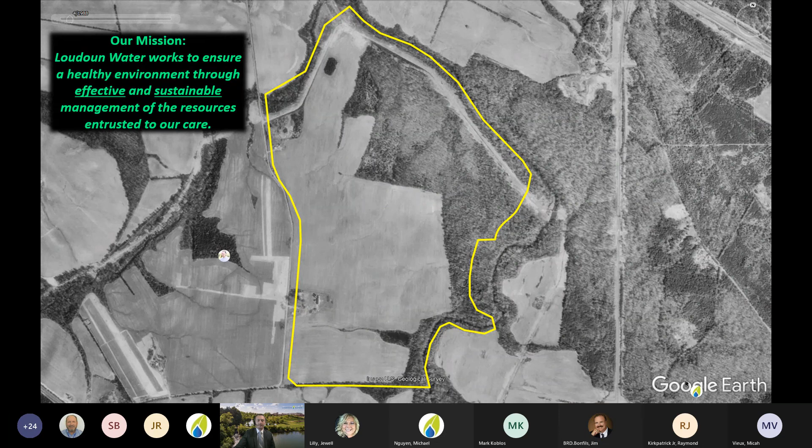So in terms of our wastewater program, I like to think of it as a story. And when we look back on that story, I first arrive at this image of our Broad Run property here in the late 80s. And when we purchased that property, we had a clear vision for the future. Our mission statement resonates, that we work to ensure a healthy environment through effective and sustainable management of the resources entrusted to our care. When we self-reflect on this, I think we all agree that it has truly been our effective and sustainable practices that have afforded us the success that we've enjoyed in terms of the facility we have today.

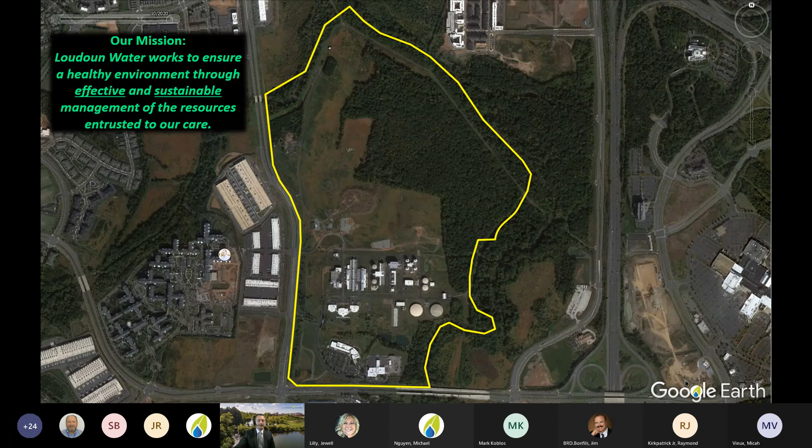And so when we play that forward, we truly have a clear vision for the future with our wastewater program. I want to pause here for a moment. This image before you depicts the master planning efforts for the Broad Run property and in the context of the floodplain that encroaches on our property. You can see here that truly our master planning efforts utilize virtually all the buildable land over time on our property. And this is important.

These planning efforts have allowed us, when we are approached by outside parties with development proposals on our property, to fully understand managing wastewater flows for the county in perpetuity. We will be utilizing this land and we're positioned to know what those plans are. So as we move along in our wastewater story and execute on this master plan, there are a few key themes that I wanted to highlight before we dive into the presentation today. And those include rapid dynamic growth.

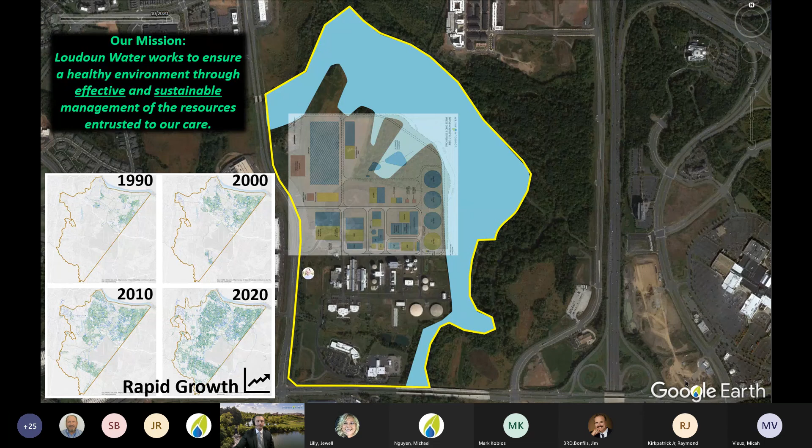And just over the past 30 years, we've seen nearly a 500% increase in the population of our service area. The second main point is the interconnectedness. Our plant is located just upstream of the major drinking water intakes for the Washington metropolitan region.

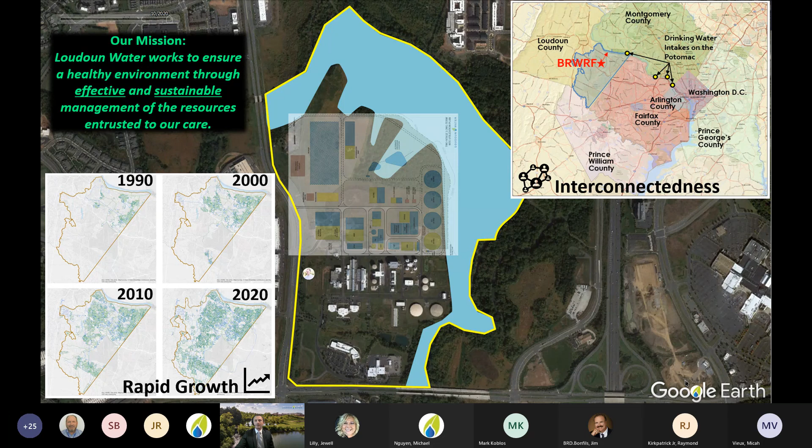And truly, that's a portion of our drinking water through Fairfax. And lastly, that is advanced treatment. So it's our imperative to employ advanced technologies to protect the resources that I described a moment ago. And so this all boils down to a key practice for us, and that's been effective and sustainable planning. Notice those key words from our mission statement keep popping up. And when we look back across our history, this practice truly comes to life.

From our inception, we've proactively managed wastewater capacity with DC Water through the Potomac Interceptor. And then moving through time with respect to Broad Run, the planning started for the facility well over 3 decades ago. Various studies in the 80s leading up to the purchase of the property, and then early entitlements work to allow for construction of the facility on the site.

Getting into the late 90s and into the early 2000s, early piloting of the technologies that we would later employ there, design and construction of the facility in the early 2000s, and then leading into startup and commissioning in 2008, and then the recent master planning efforts and current expansion efforts underway. So it's been our continuous adaptive planning over time that's kept us nimble in this success story and within those themes of rapid growth, interconnectedness, and advanced technology.

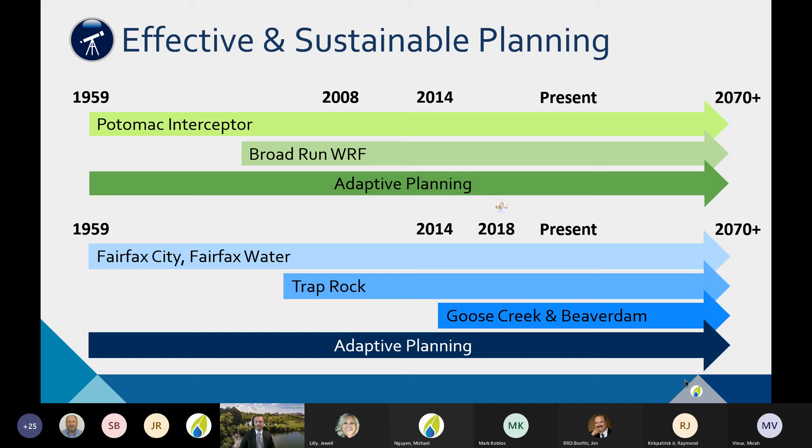And so I just want you to keep that in mind as we round out this introduction with a few key takeaways. And that is, the wastewater flows are continuing to increase steadily, and they will continue on that trajectory with Metro and the development intensification, data center growth, and so forth. And we're continuing to track that and react.

And secondly, again, the interconnectedness of our system, both physically and by permits. There's really, again, an imperative on us to protect the environment. And our permit, as we grow, our discharge limits approach those of drinking water quality. So that leads us into the advanced treatment technologies.

And lastly, again, the long history of visionary and adaptive long-term planning. So that really rounds out the key takeaways that I hope you will keep in mind today as we go through this presentation. And I'm going to go ahead and hand it off now to Kendra Sveum, and she currently serves as the plant manager of our Broad Run Water Reclamation Facility.

Kendra, I think you're muted.

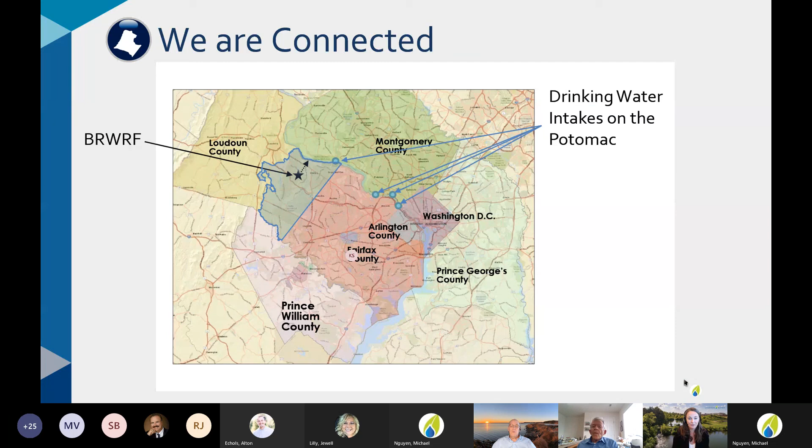Absolutely, PFAS is definitely a hot topic for wastewater treatment plants. To the benefit of how Broad Run is already set up, I think it's a testament to how advanced we already are. The key technology the industry is looking to for removing PFAS is granular activated carbon, GAC. The fact that we've already got that GAC process means we're doing a level of PFAS removal prior to our discharge.

PFAS gets incredibly complicated on the wastewater side because when it's present, it can change forms as it moves through the treatment plant. We can take really long PFAS chains that are hard to measure, so they don't show up in our influent, and break them down into shorter chains that are easier to measure. So there can be times our effluent looks higher than our influent, but it's because we've transformed that PFAS - not that it isn't naturally occurring, but the process of breaking it down in the bioreactor is natural, into something more easily measurable.

So we're definitely studying this at Broad Run right now, evaluating the performance of our GAC and what's going on there, but we are very well positioned for effluent removal. The area where we really need to look going forward is that it accumulates in the biosolids. So our major outlook is: what do we do with what's in the biosolids, so that we can still land apply those solids? That'll definitely be a topic over the next couple of years - what treatment processes can best address that. Thanks.

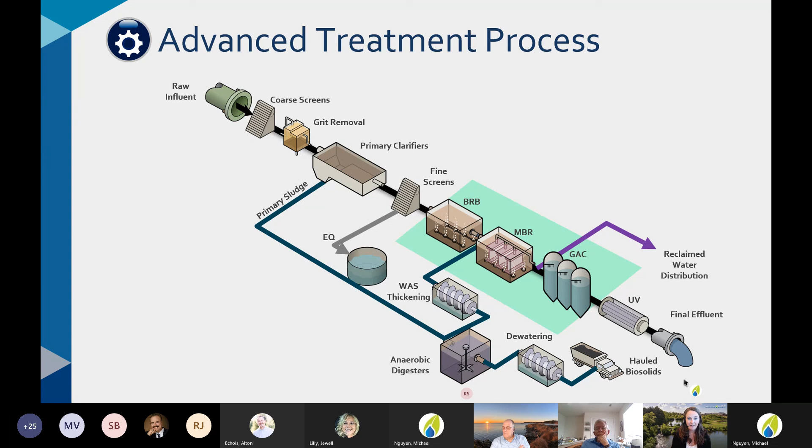And additionally, phosphorus is astounding, right? We are at a total phosphorus limit of 0.1, where this utility is at a total phosphorus of 2. So we are orders of magnitude higher in our nutrient removal levels, and it goes through all of the numbers.

E. coli measures our level of disinfection, so it's even lower. Broad Run has been held to a higher standard historically because of our location, and because of that we put the right technologies in from the beginning - the GAC is a great example, positioning us well for contaminants that are just now coming out. That's why we're going to have to continue this exceptional level of work and make sure we're taking into consideration the processes everyone around us is using as well.

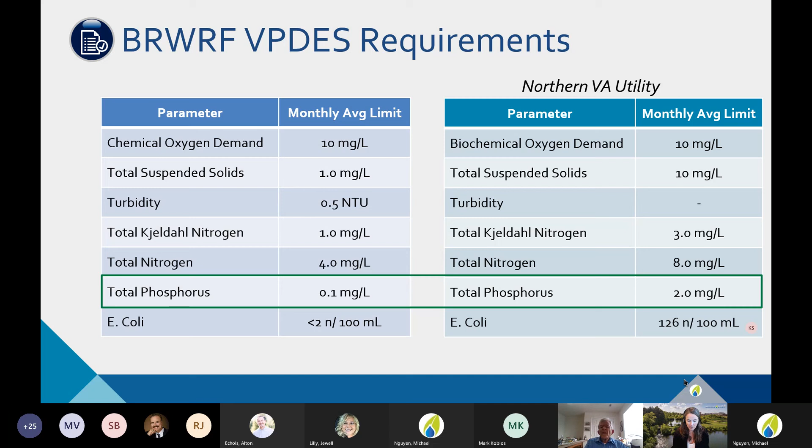So we want to transition now, unless there are any other questions about technology, into our projections of what we're looking for in the future.

All right, I'm going to turn this initial discussion over to Darrin Geldert, who is our Manager of Planning Programs, to talk about growth in the county. Thanks, Kendra.

So in order to maintain that kind of effective and sustainable planning that Alton was talking about, and this adaptive planning that we do, it's really critical that we have a long-term vision as we develop our planning projections related to our permits, loads, and flows. That's the most direct way you can see it. As Alton showed us, this whole area is a really dynamically growing region, and this growth is pushing us forward a lot faster than the rest of the state.

So we're out in front, similar to our permits that Kendra was mentioning. Loudoun County continues to be one of the fastest growing counties in the state, and actually even in the country. So as we look forward, it's a bit of art, a bit of science, and we know these projections of growth have both lagged and exceeded the actual realized growth over time. So what do we do? Well, we lean on the county, because they are responsible for growth projections, and this is a key that we have to follow.

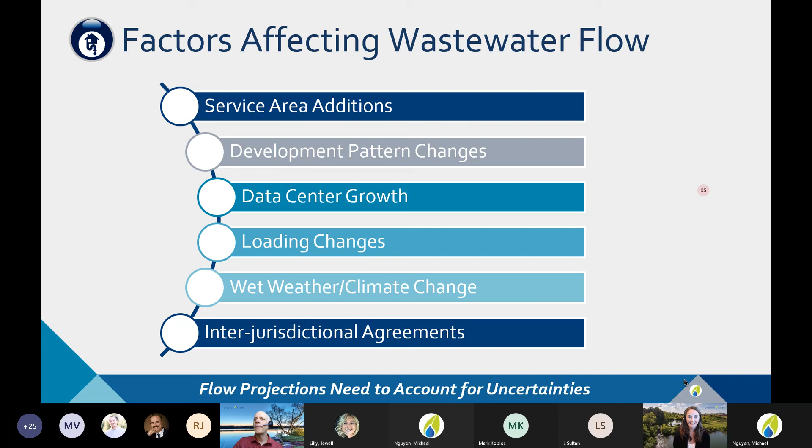Thanks, Darrin. So definitely at Broad Run, we spend a lot of time looking at where our flows are going and what our treatment capacities are, to make sure we've got a handle on where we are today and where we need to be in the future. So Loudoun Water is amazing, and the amount of flexibility we have allows us to use different tools to meet the needs of our service area.

So I wanted to start with just this map, because our wastewater treatment capacity is broken into 2 increments. We have the agreement with DC Water for wastewater that we can send down the Potomac Interceptor, which travels through our service area in this general area, down to the Blue Plains Advanced Wastewater Treatment Plant. So this blue area right here is the portion of our service area that continually goes down to DC Water. The brown area is the area of flow that travels directly to Broad Run.

Broad Run is located right in the middle of our kind of PI portion of our service area from the Potomac Interceptor. We've got this green portion down at the bottom, and this is our section that flows by gravity through Fairfax County down to UOSA. So we have a 1 MGD agreement with UOSA, and then the capacity that we have by agreement with DC Water is 13.8 MGD.

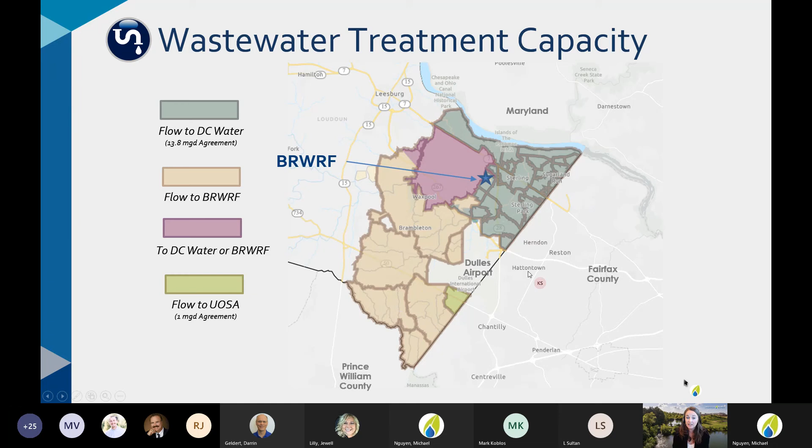So due to its size, it is more cost effective to treat flow down there. So we want to maximize everything that we have from that agreement. When we look at our wastewater flows, we need to look at the total wastewater generated from this service area and then balance that out between Broad Run's capacity and our agreements with our neighboring utilities to get additional treatment capacity.

So that's what we want to look at here. This graph is a little different than graphs shown in the past. It's showing our total wastewater flow, and we've got 2 lines showing our combined treatment capacity. UOSA and that small green area flow has been excluded from this discussion because there's no control down there over being able to send more flow. It's a passive system. So if we take our current Broad Run capacity of 11 MGD, and I don't think I stated that previously, but we have 11 MGD right now, and DC Water 13.8, that puts us at about 25 MGD of total treatment.

So what we've been monitoring as we monitor growth is how fast this flow is increasing. What we've got plotted here, this line is just a straight line average of the last 10 years and how fast flow has been increasing. It's about 0.6 MGD per year. We can carry that projection forward and say, based on development patterns continuing as they are, a simple statistical projection shows that by the year 2030, we're going to need maybe a total of 28 MGD treatment capacity if we continue at that rate.

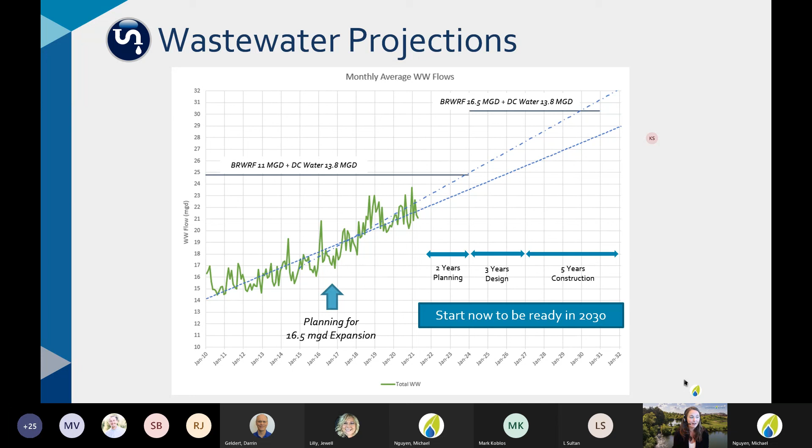And so that is part of the process we're going to be talking about, how we've prepared for where we are and where we want to move moving forward. I want to switch topics, unless there are other questions on the flow projections, into what we're looking at and our major work to be done in establishing what we're going to build next.

One of the major challenges that we have is our waste load allocation, and I wanted to take some time to talk about what that allocation is. Probably 1.5 years ago, we came to a board meeting and talked about the Chesapeake Bay Watershed Program and the Phase 3 WIP and the modifications DEQ were talking about at the time. So this all factors into a lot of that.

Just as a refresher, the Chesapeake Bay program is about protecting the entire watershed, so it involves multiple states that all contribute water down into the bay. Each state has been given its own waste load allocation, and the states then divide that up as necessary. So what you end up with is Maryland, Virginia, Pennsylvania each implementing slightly different programs, but all to meet the state's total waste load allocation.

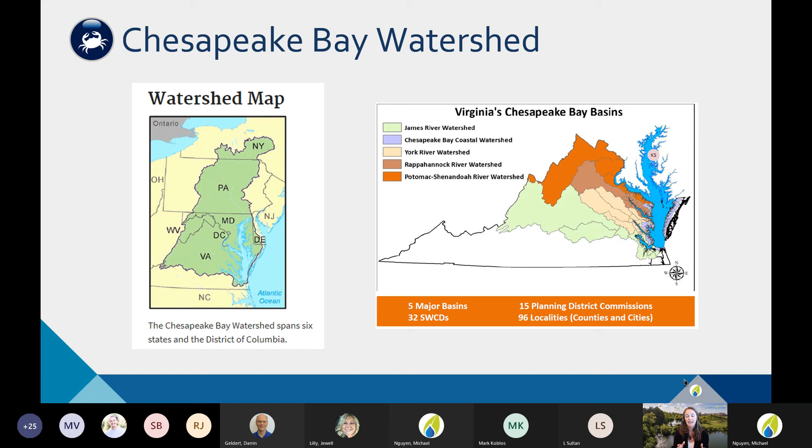Virginia has broken that down further into the various independent watersheds from the state that contribute to the bay. Broad Run is in the orange, so we're in the Potomac River watershed, and the Potomac Basin has its own waste load allocation that is then divided up to all the wastewater treatment plants. So this is one general permit.

It's not technically covered in our VPDES permit that we looked at originally for our discharge. It's a permit that covers all wastewater treatment plants for the state, and there's one big table in that permit that lists each plant and how many pounds of TN and pounds of TP that a plant gets to discharge.

As we've been talking through this, we have flow projections, but load projections are the other concern that we look at, because as development changes and we get more low water use fixtures, the wastewater coming in becomes more concentrated.

When we look at flow projections, that's typically done assuming those base constituents like COD, nitrogen, and phosphorus are all at an average concentration. But if that concentration changes, we get more pounds in. And that's what the treatment really has to be based on, is can we remove each pound of phosphorus and nitrogen that we have entering the plant?

That's the way our discharge is permitted for the bay, because the bay itself really just cares about the total pounds of nitrogen and phosphorus available for the biology in that location, causing algal blooms and decreasing water quality there.

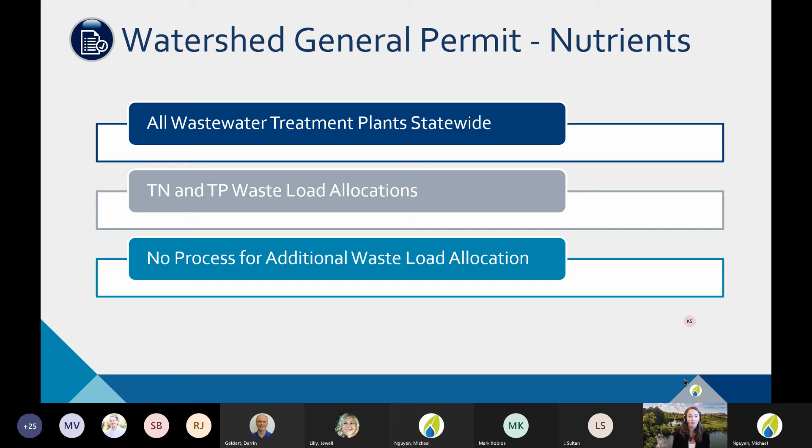Broad Run is now really one of the first wastewater treatment plants running into that limitation. We're expanding faster than any other plant in the state and running up against the limits of our waste load allocation. Because our allocation was given on a number of pounds, and we don't have a process right now to get more pounds, as we discharge more flow that drives the concentration of our effluent lower.

So this table is just illustrating the equivalent concentration that Broad Run's effluent needs to meet so that we remain within the pounds of discharge that we have right now.

We were given our initial allocation based on our 11 MGD design capacity and a TN concentration of 4 and a TP of 0.1.

Regulatory for the state of Virginia, the limit of technology for TN removal and TP removal is considered a TN of 3 and a TP of 0.18.

So even from our inception, our TP effluent concentration was really considered beyond limits of technology and state of the art.

Nitrogen was allocated throughout Virginia on a TN of 4 basis, but the DEQ will be looking at any plant needing to expand as going to that limit of technology, a TN of 3. That's just as regulations stand right now.

What is unique for Broad Run is where our waste load allocation takes us beyond that. So after our expansion, when our actual wastewater flows start reaching 16.5, we would need to be at an equivalent total nitrogen concentration of 2.6, and phosphorus would be down at 0.067.

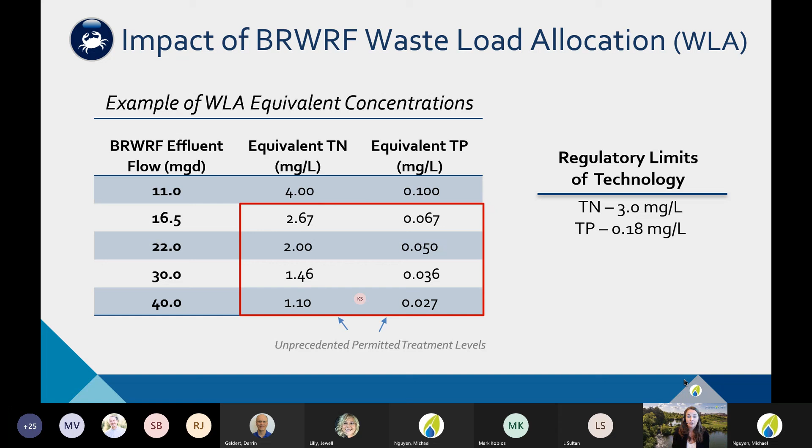So while that looks scary in terms of the numbers, we have a great plan. As part of the master planning that was done in 2016, a large nutrient management study was done that literally looked at the world of options in terms of what can we do to manage nutrients.

Is there a way to remove them in the collection system? Is there a way to look at algae removal, just really advanced technologies that we can do? And it's given us a toolbox. So while we work out with DEQ where we think that effluent requirement is going to go, we've got tools that we will use in the meantime.

The reclaimed water system is an extremely valuable tool for this. That is our method of, while we have flow coming in, not discharging all that flow back to the bay. We're diverting not only the flow to our reclaimed water system, but those pounds of nutrients as well. In general, the flow that we send to those cooling systems, we only get about a third of that back. So it has reduced the water and concentrated the nutrients, so that when it comes back into Broad Run, it's in a range that we can easily remove. That's a tool that's going to help us going forward, and it will definitely pay off to maintain and continue to support that program due to the amount of offset it can give us.

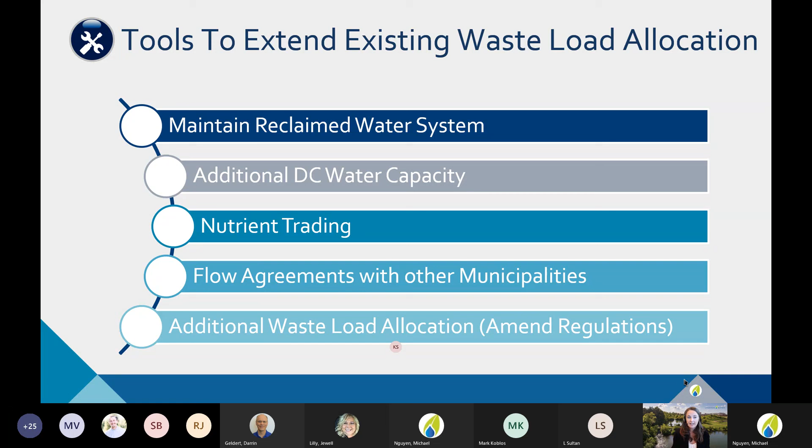But really what is key for us, and what we've been focusing on very heavily over the last year, is forging a way to change the regulations so that there is a pathway to get additional waste load allocation. We feel very strongly about this one because it was acknowledged in the beginning as an issue that was going to need to be solved. Since Broad Run is really leading this charge, Loudoun Water will be one of the leading utilities to really push this through, but our goal is to have something that works right for the whole state.

So we wanted to give you a brief update on where we are in that process. We started in November of 2020 with just approaching DEQ and having a meeting to make sure that they understood the issue that we had. We showed them similar flow projections and laid out those equivalent waste load concentrations, and talked to them about what would be some options for us, also gauging how open they were on this.

It just so happens that in 2020 and 2021, that nutrient general permit was up for renewal. So we took that opportunity to submit a public comment to DEQ and also the State Water Control Board, really laying out this issue and illustrating that there is a deficiency in the regulations as they stand, not having a way to get additional allocation when it's needed, not for backsliding or reduced treatment, but just to accommodate growth. In Carla's board comments at the March board meeting, we laid out that we would submit this comment during the public comment period on that renewal, and kind of see what happens from there.

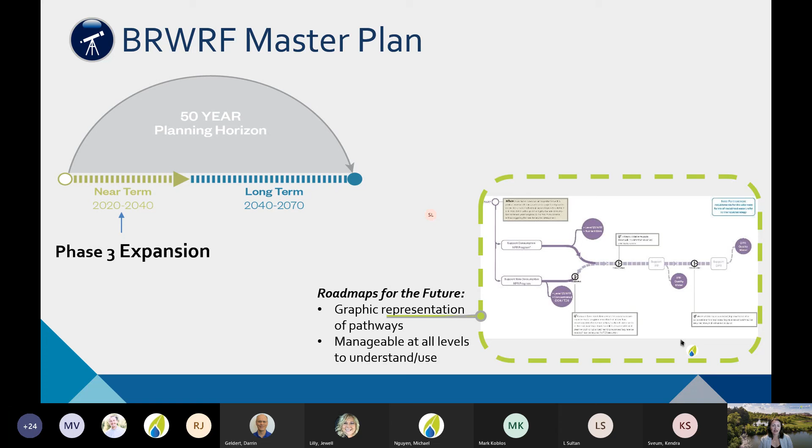This is that adaptive planning that Alton was talking about. One of the valuable things Alton mentioned was looking really far out—what did we gain in the master plan? One of the really valuable things we understood was that the land we have will be used in the future based on what we think is in the world of possibilities. That was valuable for us.

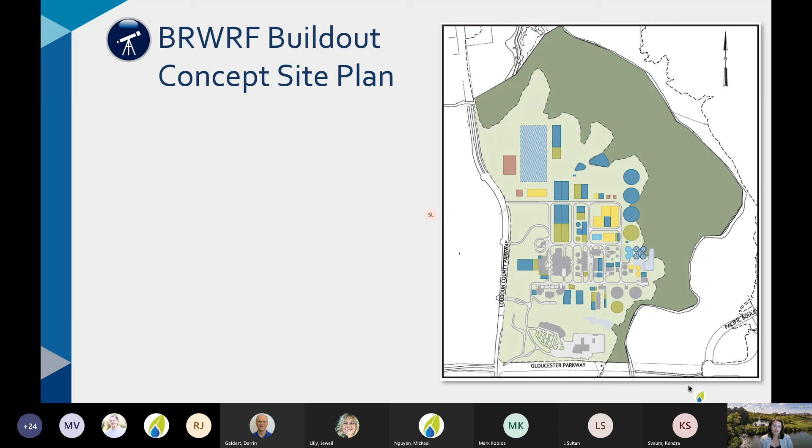We're operating facilities, so naturally we have needs, and we've identified other opportunities—things like the reclaimed water pump station you see here and storage tanks. That wasn't part of the original facility, but it was a great opportunity for us, so that project was constructed. The facility has continued to evolve, and we've learned a lot as we've operated it.

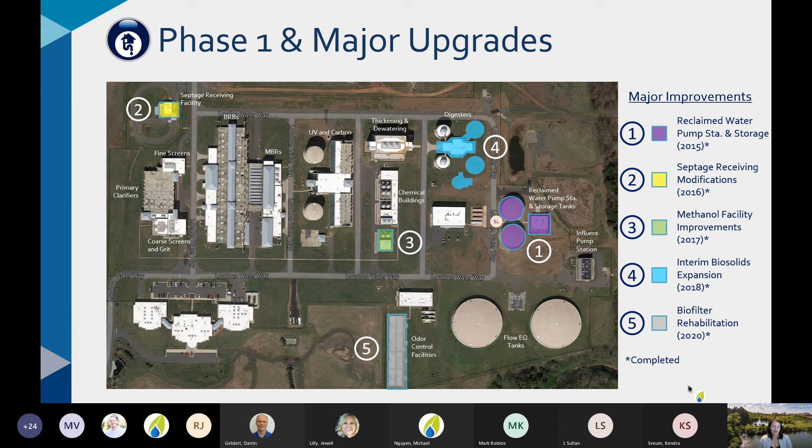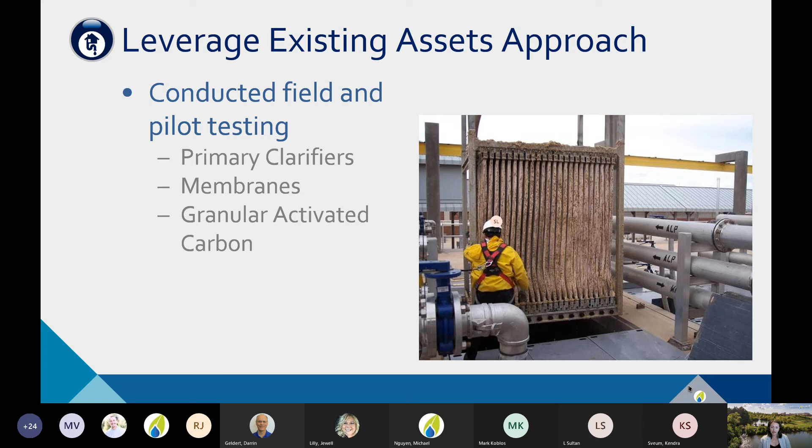What that meant for us was to leverage the assets we had already invested in. So the heart of the plant, this picture here is one of the modules of the MBRs, the membranes. We looked at that technology to understand what we could do to squeeze more capacity out of it so we wouldn't have to invest in more concrete. What can we learn about our granular activated carbon system to squeeze more capacity out of it? We learned that some of the original design criteria used to size the facility, as we'd operated it over the years, had some juice for squeezing. So we took an approach to build our phase 2 expansion project.

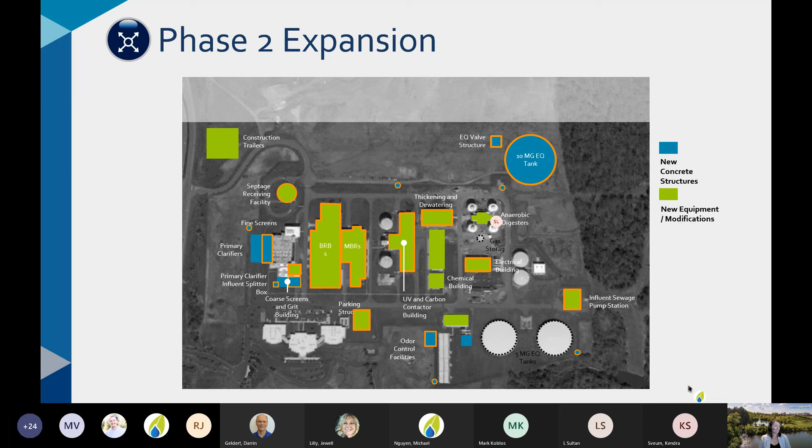As we went along in the phase 2 project, we started to look at other Broad Run projects out there. We have a really robust asset management program that helps inform projects needed over time based on useful life and things like that. It's an operating facility, so that's just part of running it—you have equipment, renewals, and things that need to take place. We folded some of those projects into the phase 2 expansion project, and there was additional value for us, cost efficiencies that could be gained by doing that.

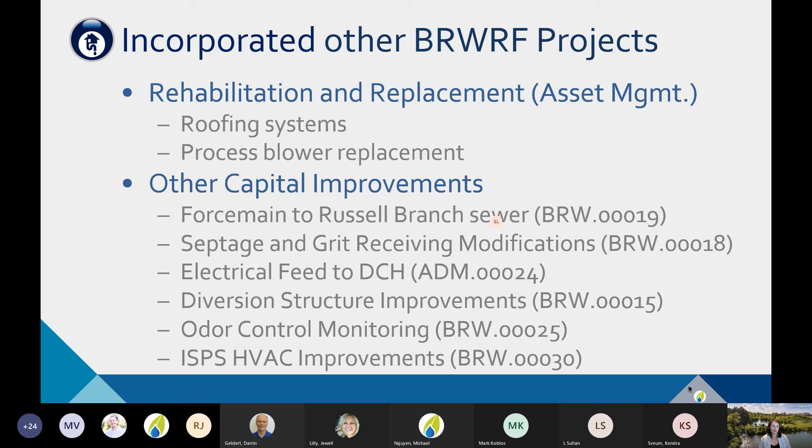Naturally, there were other capital projects identified over previous years, some consistent with or predating the expansion design. As we looked at what the project was and the timing for these other projects, we were flexible and nimble, and realized the benefit we could gain by incorporating some of these other projects into our expansion project. This is the approach we take as we navigate a project—constantly feeding data and understanding what else is going on related to facilities to help us build the best project with the most cost efficiency.

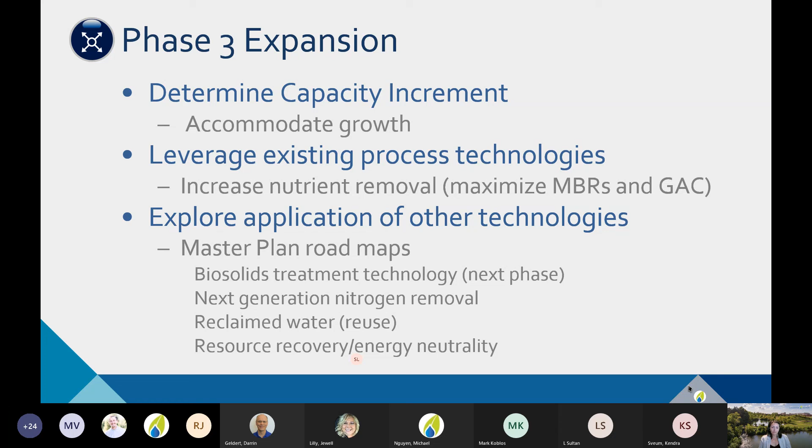We're going to take a similar approach to what we did before, really trying to understand if there are interim opportunities here - things that might make sense to peel out early or package separately that give us additional benefit. There have to be drivers that really make sense. But we're also going to look at what continues to come out of the asset management program, and as time goes on we may identify changes in regulations or code or other things like that - what's coming out of capital planning, what's going into our CIP.

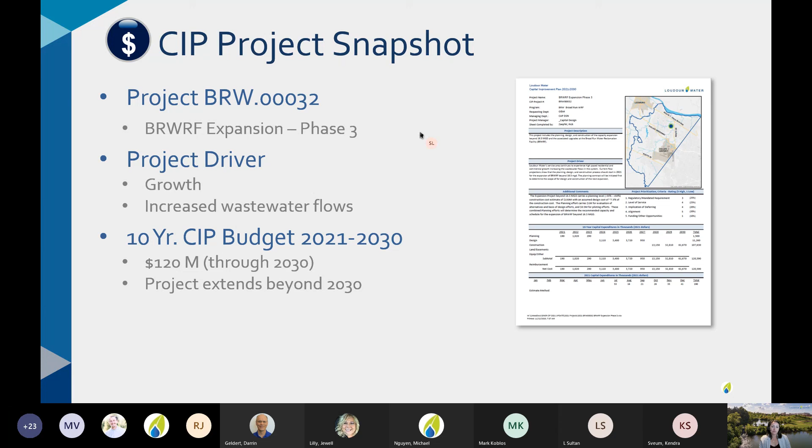All right, so a little bit on timelines. We have the current construction project right now, showing that going through the end of 2024. I think substantial completion is February of 2024, and it should be wrapped up by fall of 2024.

As Kendra mentioned, we have this ongoing work related to modifying the regulation around waste load allocation. And then we have the phase 3 project, laid out as a traditional delivery - design, bid, build. Again, consistent with our adaptive planning approach, we're going to understand if, as we go into planning, things make sense for some type of alternative delivery, we can consider that. But right now, to be conservative, we feel like even if we lay things out in a traditional delivery pattern, we can comfortably meet and have capacity online coming from the phase 3 project. So we're looking at about a 2-year planning period, 3-year design, and then construction to follow. As we learn things through this regulation modification process, things can kind of...

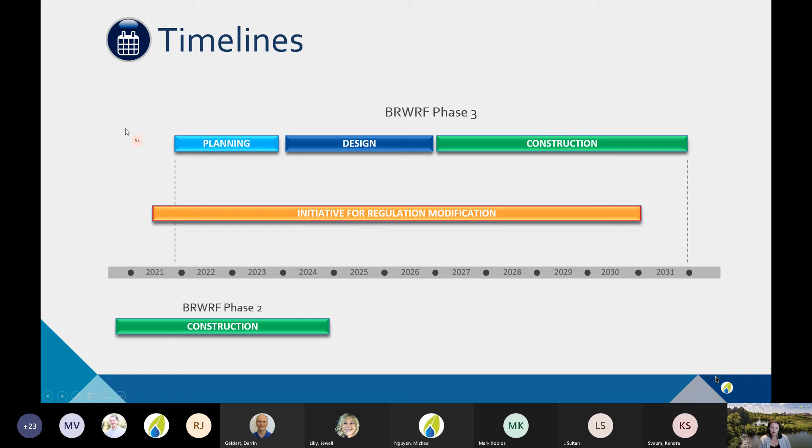But we feel like we're well positioned.

So the path forward and what you can look to see from the board perspective is that, as I mentioned, we've got a professional services contract we'd like to bring to you. We would bring a contract and an initial planning scope to the August CIP, and we feel like we're well positioned for that. We're going to continue to bring forward information on the regulation modification related to the waste load allocation, so you'll see that as well. And then wanted to touch on here at the end, this is the last slide, some of these other topics and things we bring forward to you.

We've got a robust research program, and so we might come to you and share some information on it, but understand that once you dig into what's really happening, there are various projects where the goal is specifically to gain information to inform what we're doing at Broad Run. Regardless who in the organization is leading any of these efforts, we're really well integrated and connected to be able to feed back into a Broad Run Phase 3 project, and we think that's going to help us identify the best project we can build. So that was all the information we had to share today. Happy to have any discussion about anything shared up to this point.